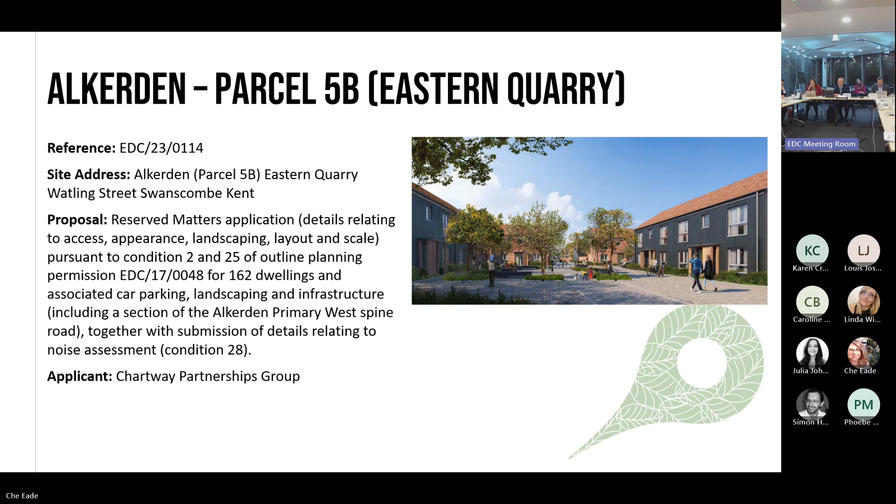This application is made pursuant to conditions 2, 25 and 28 of the Eastern Quarry Outline Planning Permission. The application is located within Whitecliff, formerly known as Eastern Quarry, which forms a strategic development site within the EDC area.

The area comprises 3 villages - Castle Hill, Alkerden and Ashmere - all separated by areas of open space. The master plan for Whitecliff embeds principles of sustainability in creating walkable neighbourhoods and a fast-track corridor which will run through the centre, providing efficient public transport connections to Ebbsfleet International Station to the east and Bluewater to the west, and the centres of Gravesend and Dartford beyond.

The site is located in the north of Alkerden village, within a walkable distance to the Alkerden Market Centre. The phase follows on from Chartway's first development, which comprised custom-built dwellings at Alkerden Gateway. The site adjoins the major urban park to the west, the Alkerden Neighbourhood Green Park to the north, the education campus to the east, and the market centre and future community hubs to the south.

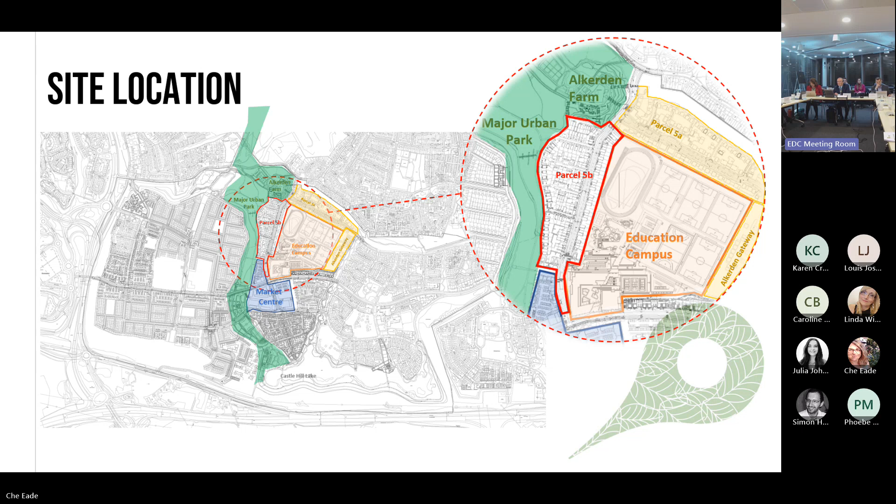In terms of access and layout, the proposals comply well with the layout and street typologies identified in the area master plan and design code for Alkerden. The north-south primary street creates a spine road for the development, providing access to the education campus and market centre to the south. Verges are predominantly 3 metres in width, incorporating regulated tree planting, and generous footways are accompanied by a 2-way cycle track, which promotes walking and cycling across Alkerden.

To the north, a short lane-like cul-de-sac fronts the neighbourhood green with positive facades facing onto the open space. The proposed development identifies 2 east-west tertiary streets, accessed from the primary street.

The northernmost street provides a formalised arrangement with soft landscape verges on either side of the road. The southern street continues a similar form and function, creating a tight, intimate street which maximises tree planting where possible.

Both tertiary streets provide links to the laneway along the western boundary, which relies on a narrow road width and shared surfaces. Also branching from the primary street are accesses to 2 enclosed courtyards, developing the design code requirement for an urban structure which pays regard to agricultural barn clusters inspired by Alkerden Farm to the north. Both courtyards provide pedestrian cycle links to the west and the major urban park beyond.

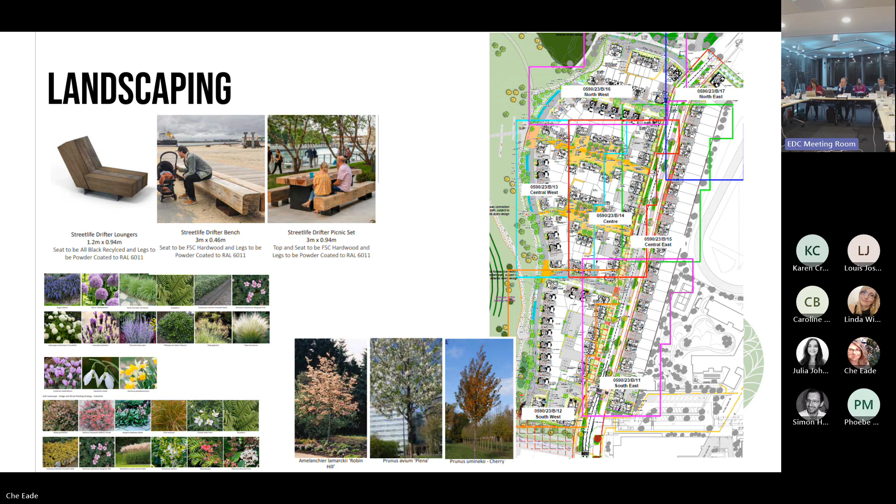Overall, the site has developed an extensive landscape strategy that is high quality and works well with the layout to create a strong sense of place.

Turning to matters of scale and appearance, the applicants have developed a design and character narrative derived from the Alkerden Design Code and EDC's Design for Ebbsfleet Guide. On the eastern edge, the form, detailing and materials take inspiration from the analysis of Farningham Village set out in the Design for Ebbsfleet Guide.

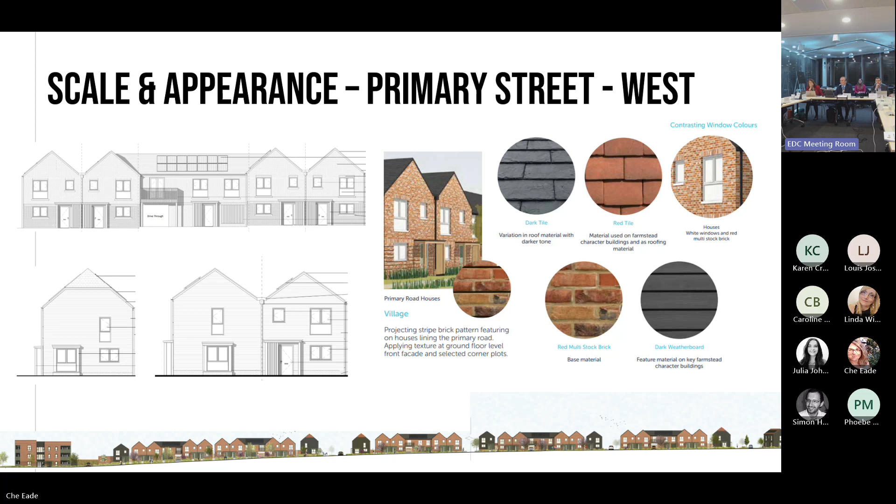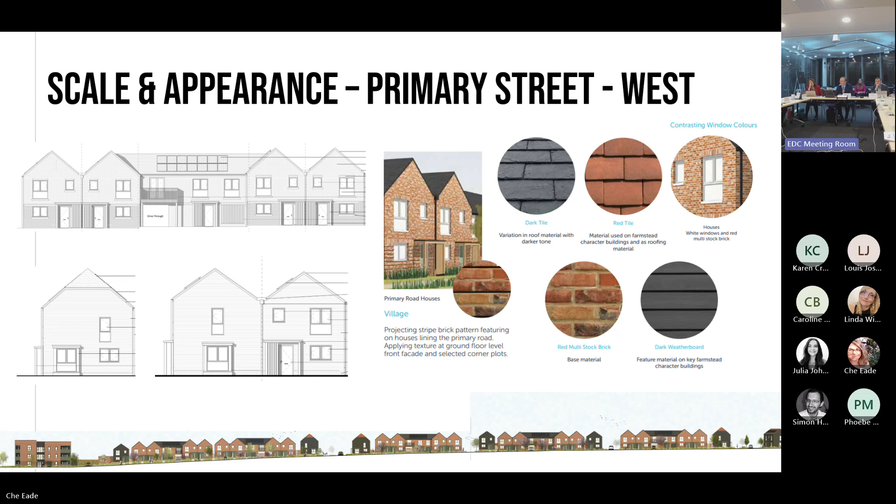To the west, the primary street's 2-storey detached and terraced dwellings provide similar enclosure. Dwellings share the red brickwork detailing of the eastern edge. However, the black weatherboarding with contrasting white fenestration introduces elements from the farmstead character to bookend entrances and assist wayfinding.

Along the western edge, the lane provides an informal street with a looser building line responding to the landscaped edge. Houses comprise larger, detached 2-storey dwellings featuring front-facing gables in red brick. A bespoke porch and front bay window in green provides a distinctive feature to this edge, while black weatherboarding units feature barn-hipped roofs, punctuate corners and bookend the pedestrian routes connecting to the farmstead courts.

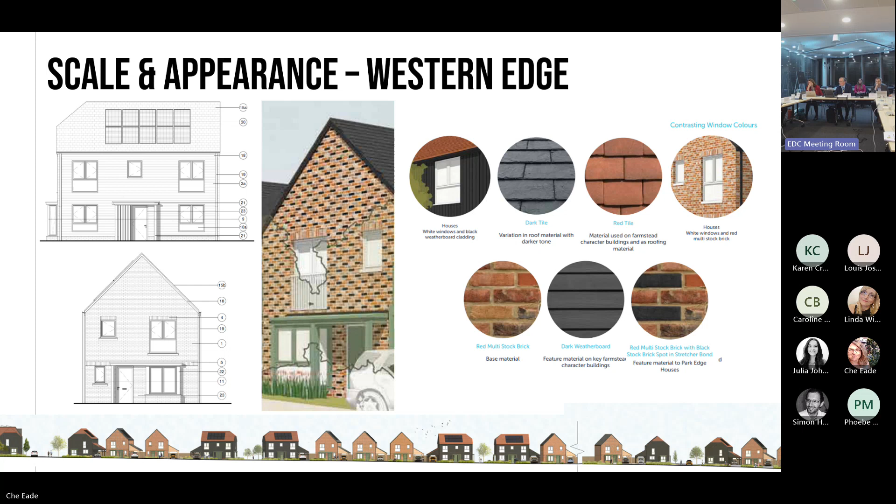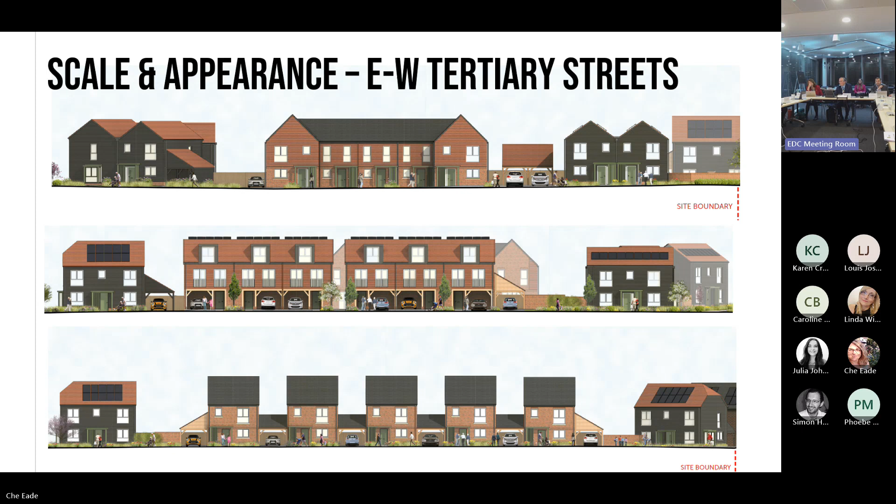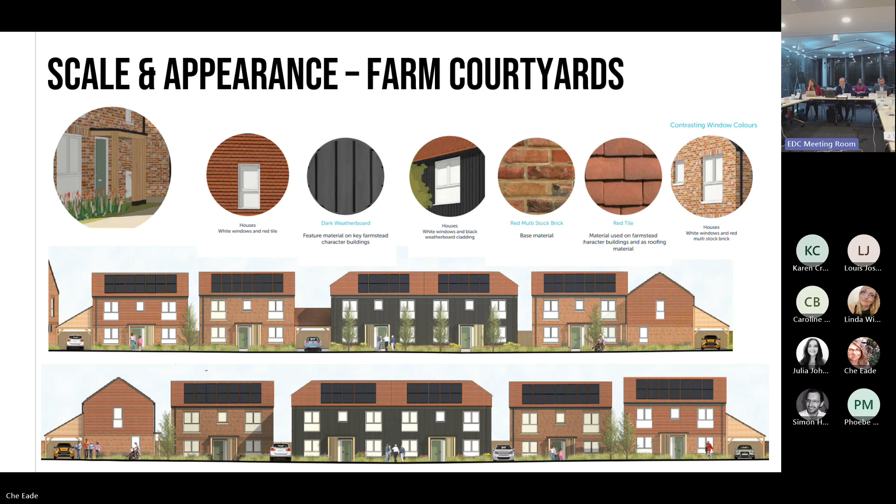The east-west tertiary streets feature a mixture of 2- and 2.5-storey house types in detached and terraced forms with a formal orientation, and the enclosed courtyards feature 2-storey double-fronted house typologies with long roof forms. Materials have been chosen to reflect traditional Kentish farm and barn buildings, using a red multi-stock brick, red hanging tiles and black weatherboarding laid in a vertical fashion.

The development includes 3 apartment buildings to the south of the site. Flat block B is situated in the southeast corner of the site. The design of this building is brick-led in approach and features projecting brick and simple soldier coursing. Black fenestration is complemented by green detailing to the balconies and entranceways, which harks back to the green materials found on Alkerden Farm.

Flat blocks C and D have been designed as a pair of buildings fronting a consistent edge to the southern boundary. Together, they will provide enclosure to a public space, which will be brought forward between the site and Alkerden Hub to the south.

The materiality of both buildings is inspired by the housing situated to the north. Vertical black weatherboarding is combined with simple red brickwork. Green laser-cut balconies and green entranceways also pay homage to the green materials of Alkerden Farm.

Across the apartment blocks, balconies comply with the EDC balcony design guide in terms of appearance and size, and balustrades have been redesigned to provide more variety, incorporating laser cut balustrading.

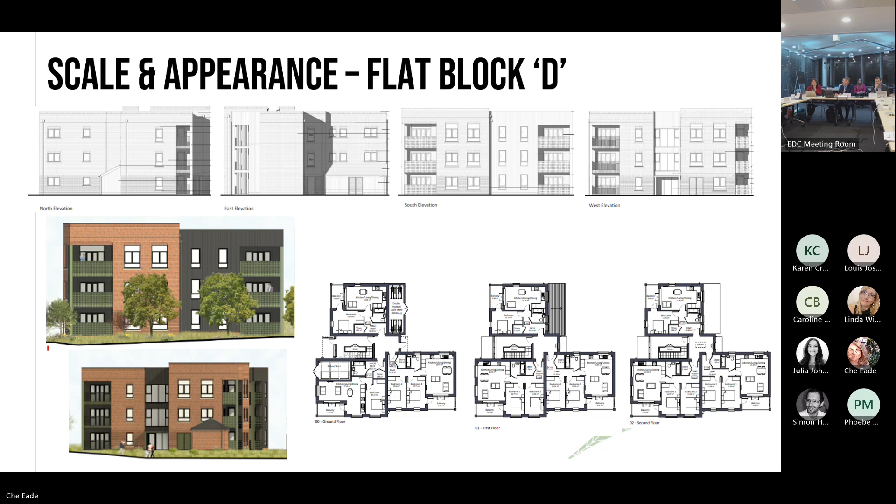The applicants have selected a palette of materials which reflects the character narrative. The inspiration from Alkerden Farm's buildings is strong and supports the creation of a distinctive and attractive development. Materials are well used to create rich visual detailing on all buildings and assist wayfinding. Final materials and detailed drawings of all architectural features are to be secured by condition to ensure high quality design and finish.

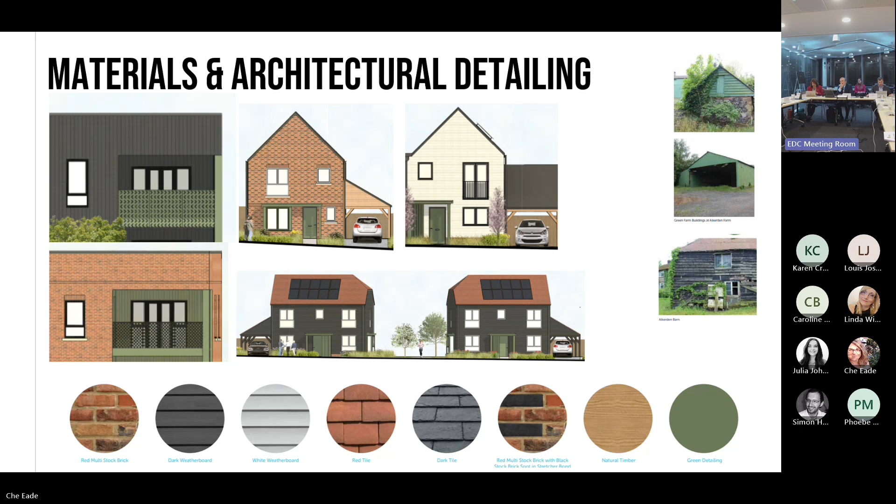The proposed development ensures delivery of 41 affordable homes, equating to 25% of housing as required by the Section 106. 8 houses are proposed for affordable rent, and Dartford Borough Council has confirmed they are satisfied with the proposals, noting it would directly address local need and help tackle shortages for larger family housing.

Overall, the proposals are considered to deliver a high quality scheme which accords well with the Area Master Plan Design Code and is policy compliant. A range of unit sizes will be provided to meet the needs of a variety of occupiers, all with access to private gardens or balconies.

The scheme scores well on the Building for a Healthy Life assessment, achieving 9 greens and 3 ambers.

It is 100% compliant with the nationally described space standards. 36% of units meet Part M4(2) of building regulations, in excess of the 25% required by the Outline Planning Permission. The development incorporates solar PV panels to all housing and apartment blocks, and air source heat pumps to all houses, meeting current building regulations Part L.

In conclusion, this is a positive scheme which will deliver high quality homes, contributing to the ongoing development of Whitecliffe and Ebbsfleet, and is therefore recommended for approval subject to the conditions detailed in the committee report and as amended by the supplementary report. Thank you very much.

Okay, that's my timing now. But it's a very informative and very useful illustration, so thank you very much for that, and timing spot on.

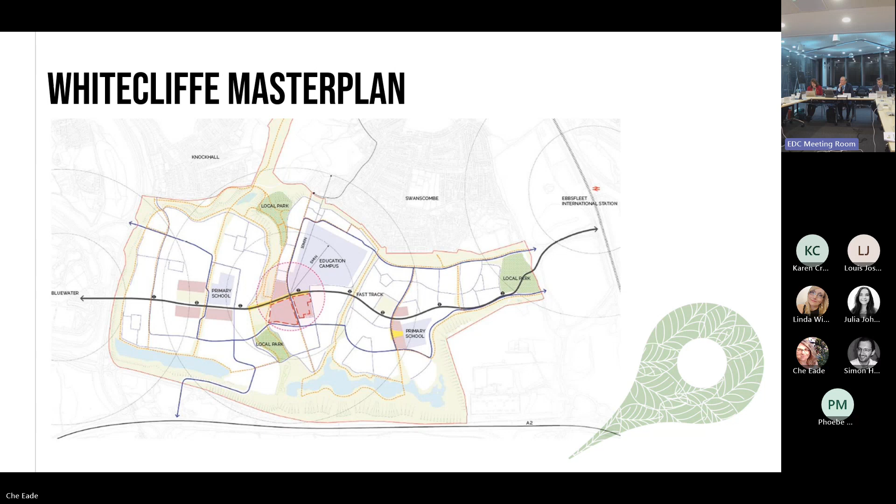We're keen to make sure the runs work for our people, that they don't get stuck trying to get vehicles in and out. There was a lot of room to move about, as long as people don't start parking in the way of the development. As part of the planning process, we produced tracking plans showing how refuse vehicles will be able to negotiate those streets.

Can I ask, just to clarify the western edge, the yellow area - will cars be able to drive along there, or will it only be access to the properties, or a through route? It will be open, cars will definitely be allowed, it is a road to drive down, just not as wide. The street strategy is you've got wider streets drawing people in, and a looser edge on the western side reflecting its location next to the major urban park. It will be publicly open and accessible, predominantly for residents, but ultimately it's also a key connection through to the major urban park, so there will naturally be footfall of people coming through the development to get there - hence the arrow locations showing the key linkages in.

A few questions as this layout is up - it doesn't actually show it, but I've seen in the presentation that the shared ownership is all towards the south, clustered together, and then we've got the affordable rent sequestered at the northern end. It's not really integrated, not really a mixed and balanced community in that sense, is it? Essentially it's an entirely private development with the affordable and social housing literally on a limb at either side.

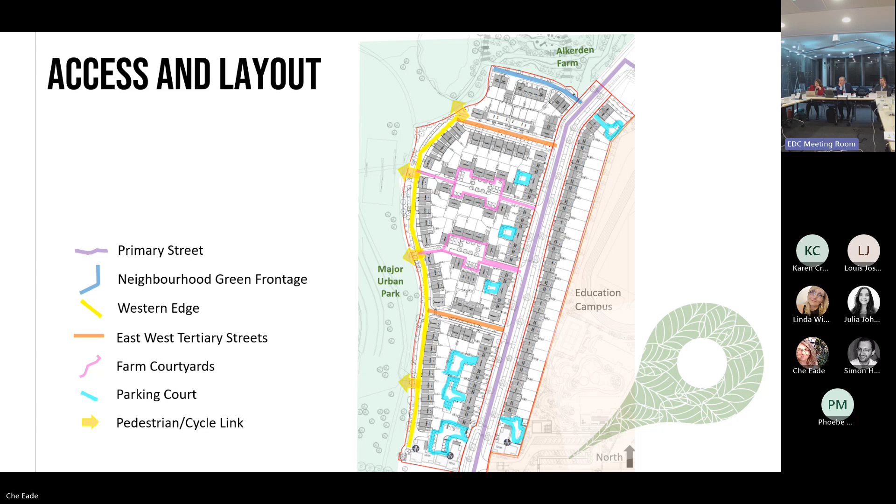Are you confident that you can resolve that and accommodate it? Since the latest round of highway comments, and indeed since the report was published, there's been a fair bit of correspondence back and forth between us.

It's actually the master developer's responsibility to deliver that spine road. They're working closely with us to agree the design, so there's been quite a bit of back-and-forth exchange. I think we're at the point where highways are happy in principle. Ultimately, the backstop here is there's a condition requiring that final sign-off process.

The road corridor is quite wide, and it's where you get a bend that you need some extra space within the road to allow two larger vehicles, a bus and a refuse vehicle, to pass each other. That has been addressed with a drawing that has gone back to highways. Highways have accepted that in principle, but the backstop is still that condition process to satisfy.

So EDC can be happy that there's a condition sign-off where highways say yes, absolutely, it's fine. I think the key point, as Che highlighted, is that by slightly amending that road corridor, we're not actually reducing trees or the overall design ethos of the scheme. So yeah, I'm confident it can be, and will be, satisfactorily resolved.

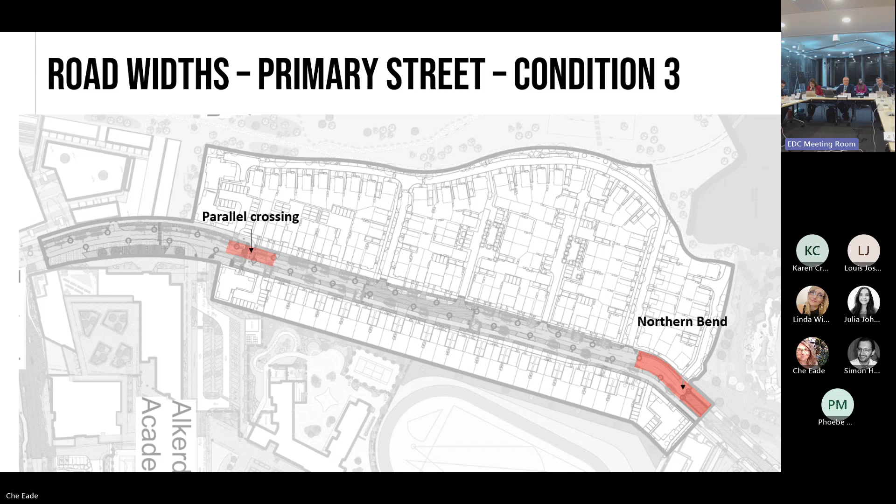As Julian touched on, there have been conversations, and I was flagging it up. This is the drawing showing the two locations, the parallel crossing and the northern bend, where those points are critical, and the informal plans have been provided.

I'm showing you zoomed-in locations so you can see the difference in the changes. This relates to the northern bend and the geometry of that smoothing out. On the left-hand side is the approved plans as set out in the conditions, and to the right is the indicative plans worked on with KCC.

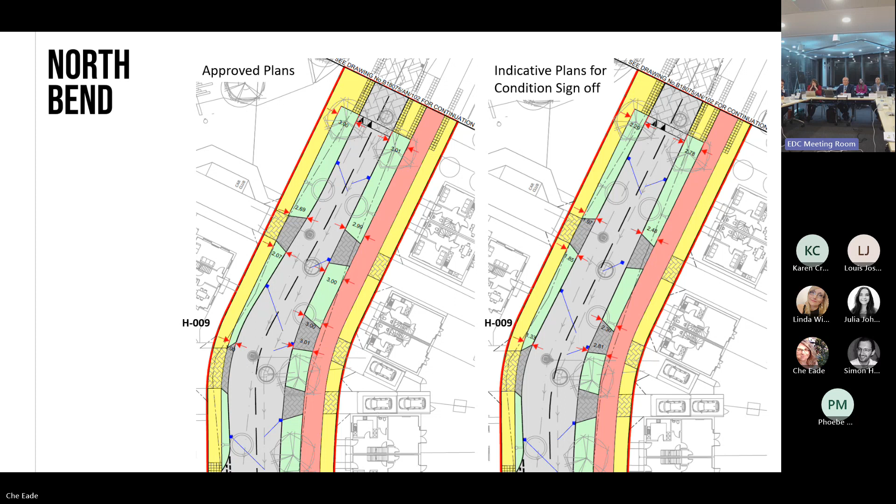You can see there's a reduction. Rather than the verge on the left-hand side undulating, it's been smoothed out, but no trees would be affected in that location. On the right-hand side there's a reduction, but it's not significant and wouldn't disrupt the landscape verges in those locations.

Then the second location, the parallel crossing - these are the plans for that. Again, approved plans are on the left, indicative plans for condition sign-off are on the right. Focusing on the left-hand verge and the reductions happening there, it basically tapers from 3 meters down to 2.60. Again, no trees are anticipated to be disrupted by those changes.

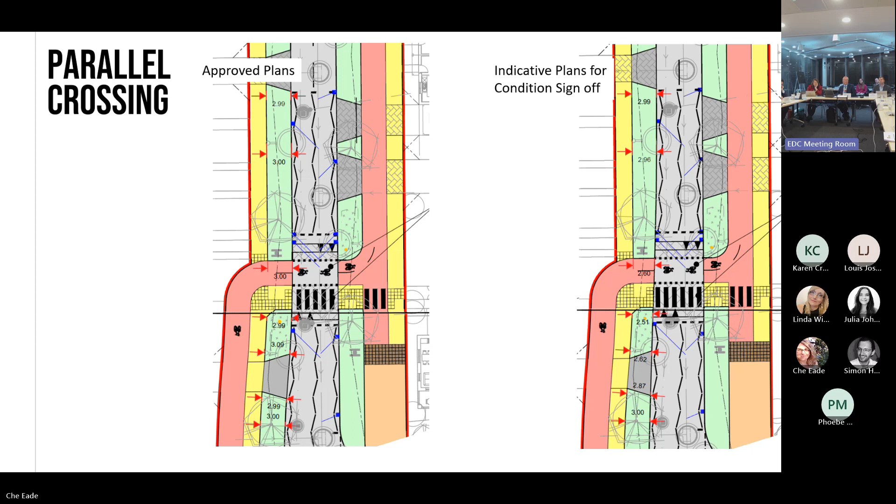Okay, that's really helpful, thank you. Right, what does everybody think?

Conclusions - it seems to me, as you said Valerie, that it's a well thought out scheme in terms of the detail, the architectural form and materials, but there are some areas where I'd want reassurance that when the landscaping scheme comes in, the points raised are met, particularly on the parking arrangements. I can see a benefit having the parking in parking courts because you don't see a sea of cars, it's behind the buildings, but it's got to be well designed.

Other views? The whole problem with parking courts is that if they're dark and dingy, they're dangerous. These, I think, are going to have appropriate lighting. The other aspect not mentioned is whether or not they're overlooked by buildings. From what I could see, most of them are, and that's one of the things we used to look at regarding safety in these sort of arrangements.

I agree with you on the landscaping - it softens the whole thing down. Safety is an issue, and as I said, people with heavy shopping and children will probably stop at the front, unload, and then take the car to the back, meaning there will be cars not necessarily parked but waiting to be parked. However, I also think there will be people that go to the back and walk. Unfortunately, human nature is such that we can't determine what people do until they start doing it - that's the danger. But if you can plan that out, that's great.

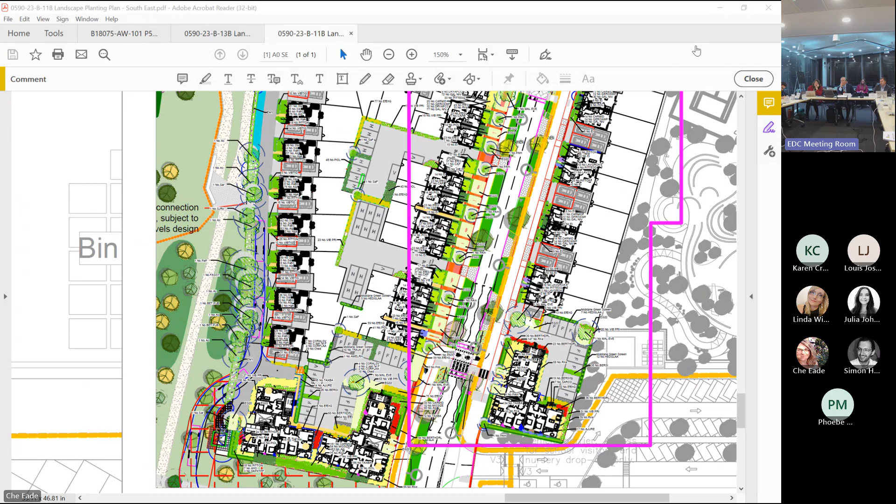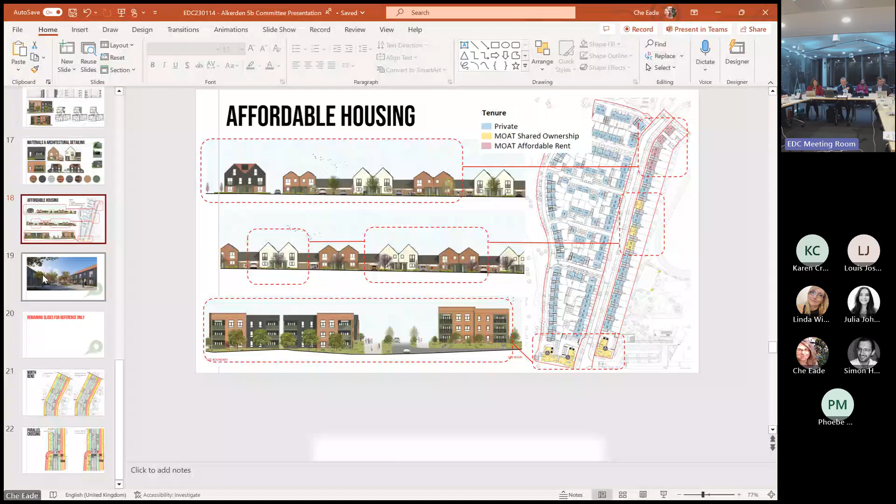If everybody's had their say, I'm going to propose that we accept the officer's recommendation, subject to the supplementary report. I did notice that when Che presented it, she referred to the supplementary report, otherwise I was going to make that reminder. So the officer's recommendation, subject to the supplementary report, and in particular the supplementary detail on conditions. Anything else, Mark? I think it's good. Well, I propose that.

And I suppose, does anybody second? Well, we can have a formal vote on it. So those in favour? Anybody against? There's nobody left to be against. So that's unanimous, there we go.

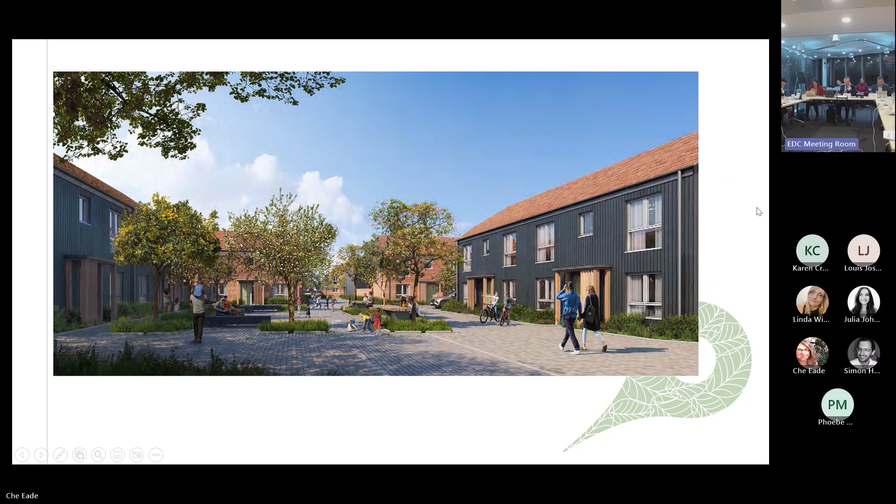Thank you very much. Now let's move on to the next item on our agenda, which is the EDC validation checklist update. Mark, are you presenting this, or Michael? It's going to be me, please.

Thank you, Chair. So you won't need a 10-minute timer for my intro, I'll keep it quite short and sweet. So you're certainly not getting 10 minutes.

Okay, so the report before you is seeking approval for an update to the EDC validation checklist. The validation checklist is an important document for development management purposes because it sets out the information needed for planning applications. It's used by officers, applicants and agents when preparing applications during pre-app discussions, and also when Julia's registering the applications. The NPPF requires us to publish these and also requires us to keep them updated. The current one hasn't been updated for a few years, so it's time for us to review it.

Officers undertook a review earlier in the year, so the whole team fed into things. The changes we were proposing were mainly presentational, with no substantial new content being incorporated. We did beef up some requirements for design and access statements, particularly given the design quality retention issue we've been experiencing. There's some stuff in there around requiring schemes, through a design and access statement, to identify aspects of the scheme that create that distinctive character - that narrative. So there are key elements that we understand we can secure and try to isolate that from being value engineered out.

So it's a bit more of an emphasis on that, and it reflects new ways of working, removing the requirement for hard copies of everything to be coming in with applications. So more electronic based as well.